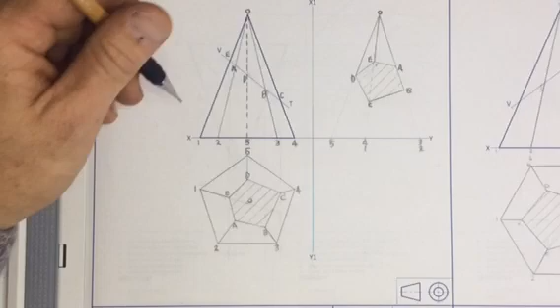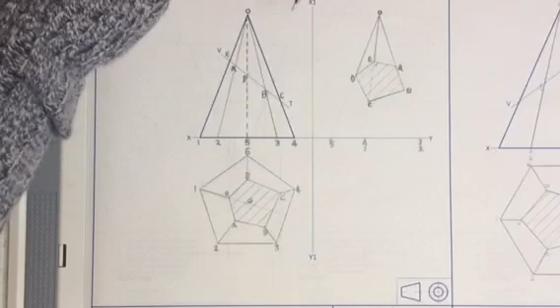Now, for me to see a true shape of anything, I need to look at it at 90 degrees. I need to place myself in a position where I'm able to look at it at 90 degrees in that direction, or in that direction, to see it at 90 degrees. I can see there's too much going on at this part of the drawing, so I'm going to be looking down in this direction onto that cutting plane to find out what the true shape is going to be of that cut.

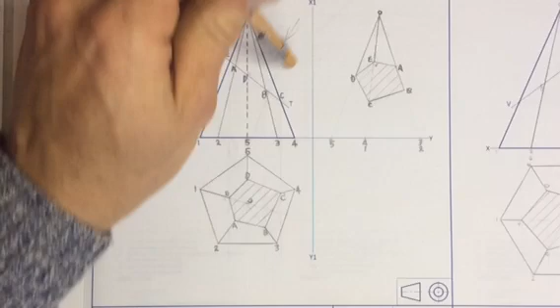You can see the cut over here, but that is not a true shape. Reason being is that it is at a slant. If I'm looking at something at a slant, I can't see a true shape of it. If you look at my pencil over here, you can't see the true length of that pencil because it's at a slant. If I lay it down like that, now you can see the true length of it.

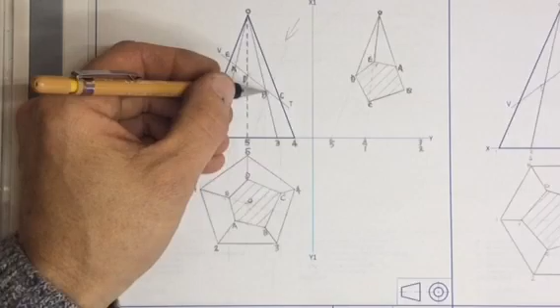Same story over here. All of these lines, say A to B, it's at a slant. A to B, you can see that length and that length over there, they're not even the same. For me to see that AB length, I must see it at 90 degrees. The way I'm going to do that, I'm going to first of all get two set squares.

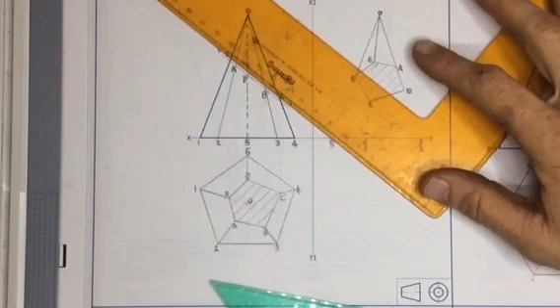And I start out by lining a set square up on the cutting plane VT. You then take your second set square. Let me just do it over here so that you can see the second set square. Right, so it's lined up on VT. Place your set square up against the edge of it and slide that back.

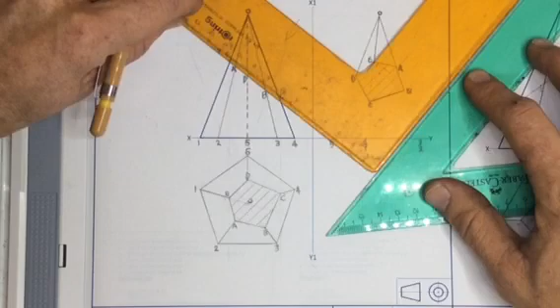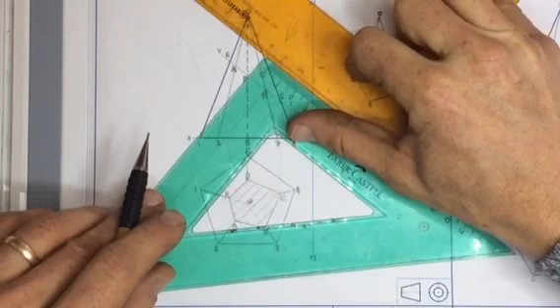Once you've got that, take your other set square, swing it round so that you are able to draw lines going at 90 degrees off all of these points. That is vitally important. You must have lines going off at 90 degrees to that cutting plane.

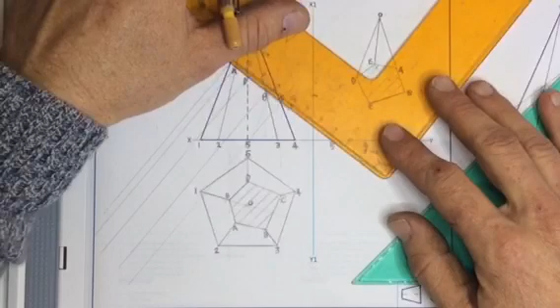Once I've got that in place, again, line your set square up with that VT. Place the other set square up against the edge and slide it forward, and draw an XY axis over here. X, Y.

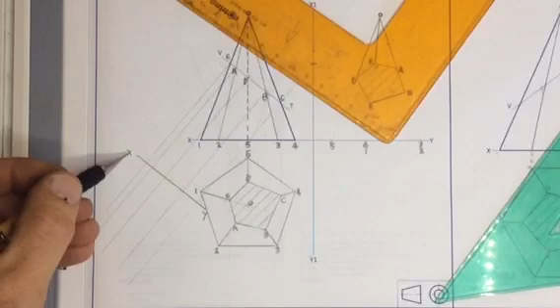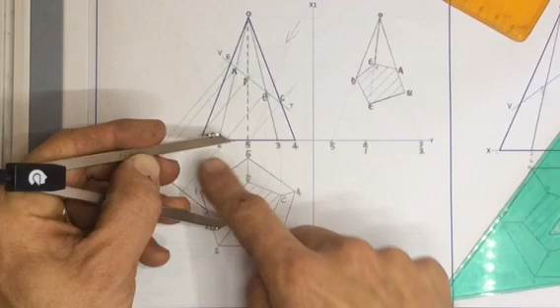Once I've got that XY axis in place, then you can take your pair of dividers again. Just going to use my dividers. There we go. And you can take your measurements from this cutting plane over here. So say from point A, let's go to point A. That's the distance from the XY axis. Find point A over here, take it down, place it down over here, mark that off as point A.

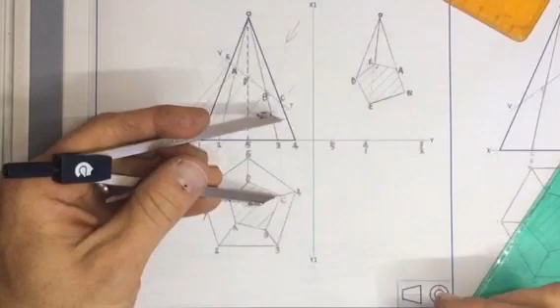Point B, that's the distance from the XY axis to point B. Find point B, go down to the new XY axis, place down point B. Point C, from the XY axis, find point C, take it down to the new XY axis, place it down, mark it off, point C.

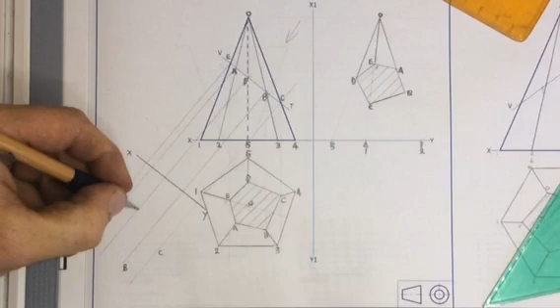Point D, find point D, take it down, mark it off, and point E, mark it off over here. Those points now, when you link them up, you will have the true shape of the cutting plane.

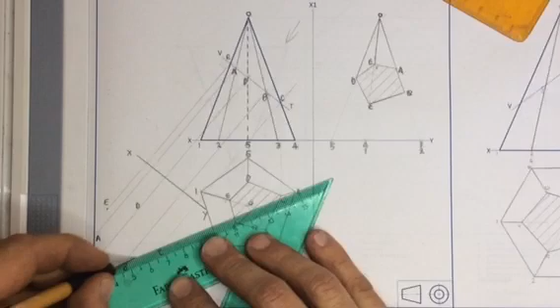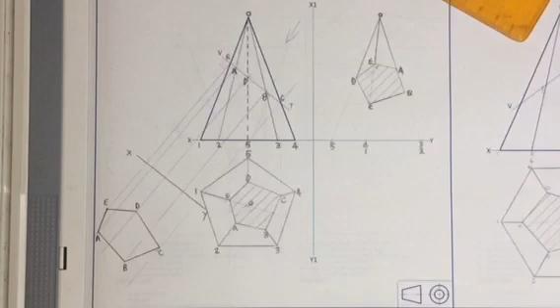At the end of the day, that shape over there, the reason why I know it's a true shape is that you'll see all of these lines coming off here are at 90 degrees. If it's at 90 degrees, I know that I'm looking at it at 90 degrees. Therefore, I've got a true shape.